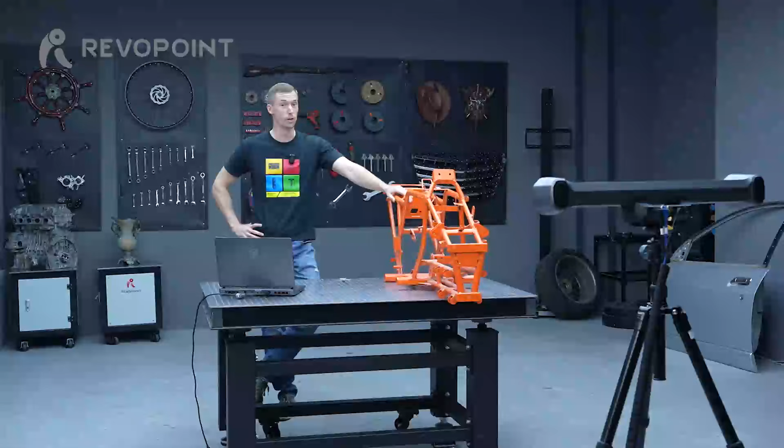So something to keep in mind. Is it small or is it large? And ultimately, do you want to merge it or do you not want to merge it? Okay, so here we go. Our first item that you need multi-positioning for, it's a little bit larger, the ATV frame.

First of all, I want to go over what kind of markers you get when you purchase Trackit. We give you a package of these magnetic ones, really nice 10 millimeters. But we also have the sticky 10 millimeter markers available, but that doesn't come with Trackit when you purchase it. You just simply have to go to our website. They're very cheap, and we'll send you a bunch of them.

Also, now the next step, the setup. I have this item. It's very long and narrow. So how I have it positioned, as you see, would be the most efficient way to do it. I have the tracker right here. I have this narrow part facing it. That's going to be the best way because it's going to allow me to simply move around it really easily, always picking up the scanner, and it's not going to get blocked. Because remember, the field of view is about 4 meters.

So if I had it positioned this way, I'd get over here, and the Trackit probably wouldn't be able to see me. So that's an issue.

So first and foremost, having the tracker there, thinking about how you want to position your object, this would make the most sense. Now as for marker placement, so I have a couple that are already out of the package. You need at least five for it to see.

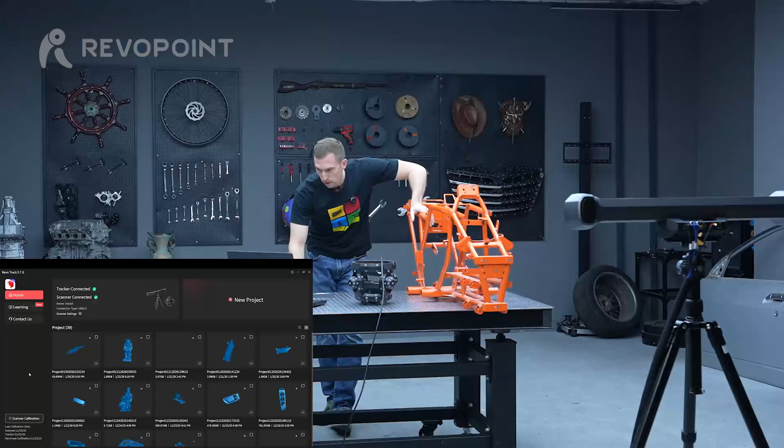So here we go. We have the option of new global marker or import global marker. If I was going to import it, that means if I had a friend or if I previously scanned and captured all the markers on another laptop or computer, and I wanted to import that data into here, I could do that and wouldn't have to capture it again. But since this is all fresh, we're just going to go with a new global marker.

And something else you can see, I want to bring this out in the lower right corner right here, you can see it says tracking quality excellent. If it ever says poor, you would want to calibrate your tracker, the Trackit, again, because that will definitely affect it. But since it's excellent, we're going to go ahead and keep on proceeding.

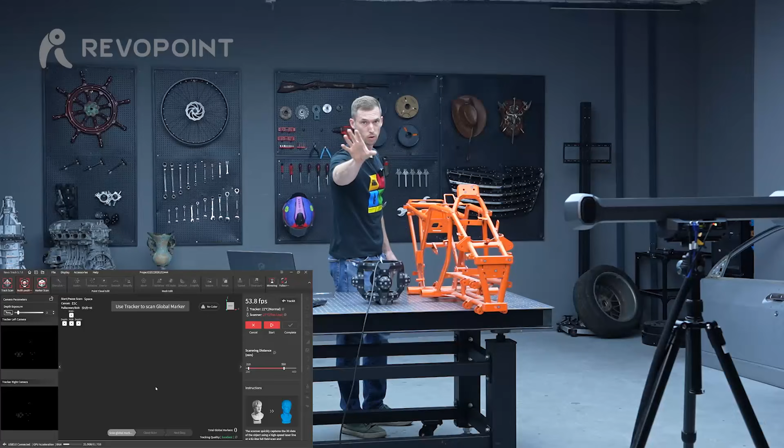And as you can see on the home screen, it's picking up all 6 markers that I have on there. This is a nice improvement with the software. Previously we would suggest putting the scanner in an area where the Trackit cannot see it, but the software already knows - it can tell that this is not part of the markers that you're putting on the item you're scanning. So you don't have to worry about it, because on the home screen it just sees what I have on the ATV frame.

So it's all good. Let's just push, let's select, I want to open this up first. Scanning distance, we can go ahead and widen that out. It's something to keep in mind. Click Start.

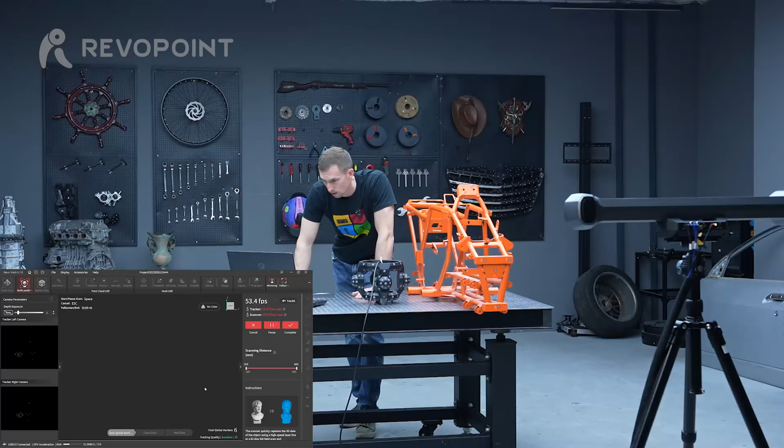Captured them. Complete. And now we're going to go on to the next process. It's captured the markers, so we're going to go on to actually capturing the point clouds now.

Don't click New Scan. Go to selecting Cloud Scan here. But we can first of all adjust this. I'm going to keep it at 0.70 target point distance. Depending on the item you're scanning, you can change right here. Let's select metallic shiny.

And here too, sometimes you'll see the temperature of the tracker and the scanner. My scanner is still a little cold - we're scanning in the studio here, which is ultimately a garage studio. It's a little tricky, so it's probably like 60, 65 degrees, or 22 degrees Celsius as we see. Don't worry about it, it should be okay. Ideal is if it could heat up a little bit, but it'll do fine. So cloud scan, go ahead and click that. And now we can go ahead and start.

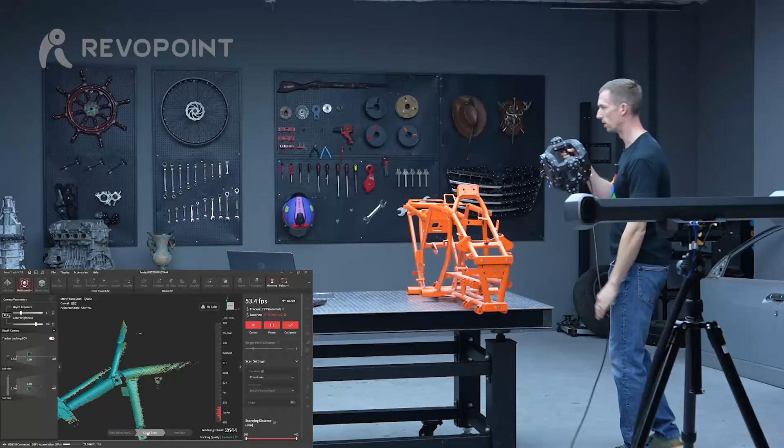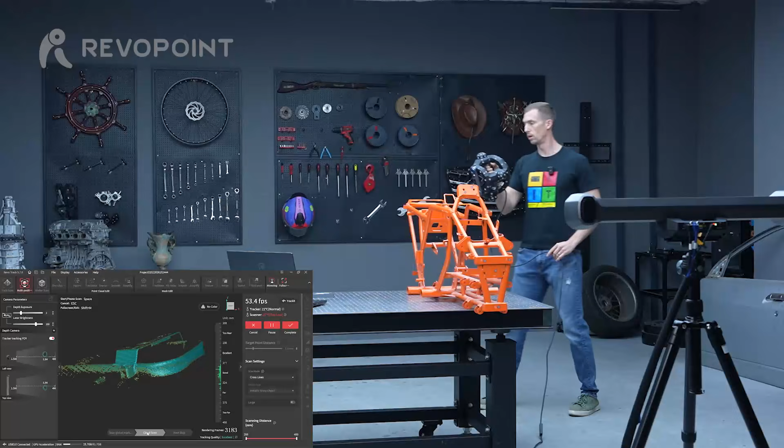You can always see on the left side the tracking field of view lets you know where you're at and how close you are. So right there, I'm getting too close to the tracker, 1.5 meters. If I go all the way to the back, you can see where you max out as you're coming up to it, 4 meters. So I got a lot of space in the back here. I can come all the way back here, plenty of space. Then even as you come to the side here, it tells me when I'm out of its field of view.

As I mentioned earlier, if we would have set up the ATV facing that way, you can imagine why that would be tricky. I'd be coming to the end here, it wouldn't be capturing it. Same thing over here too, wouldn't capture it.

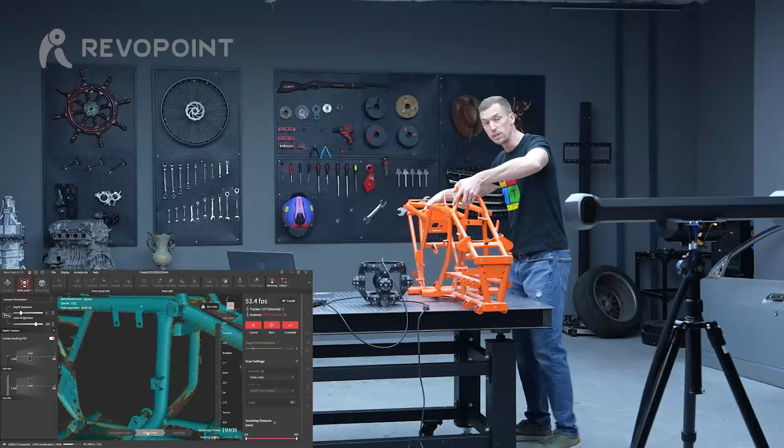Okay, so now we come to the first time we rotate it. I pause the scan, and really this is something you can also keep in mind. We have the markers on the ATV frame, so for convenience, I'm going to rotate this. But ultimately, if I wanted to, I could rotate the Trackit itself, the tracker. It just depends what's easier. Later, if you have an item that's much heavier and larger, you can't physically rotate it, so it would make sense to move the tracker itself around the item to capture those certain angles. But since this is light and small enough, I'm simply going to twist it like this and allow us to continue capturing more data.

Again, just rotating it that way, the tracker itself can still see the 6 markers that I've placed on the front.

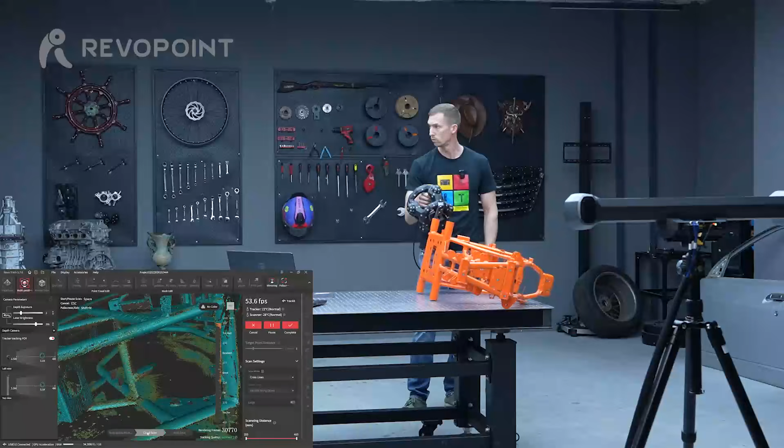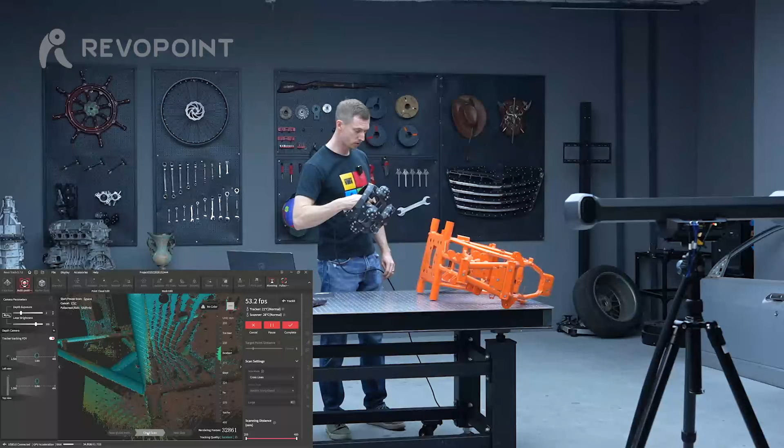So this here is a little bit of advice to you. As you can see right now, I'm trying to scan the bottom, but because when I was previously scanning it from the top, I captured a little bit too much of the table. So maybe something to keep in mind, the software is going to clean this up later. The only thing that makes it hard for me now is just seeing the holes, what I'm not capturing on this bottom plate, because I have a little bit of noise from the table. So if you can, when you're scanning an object, try to avoid capturing as much as you can from whatever surface your piece is sitting on.

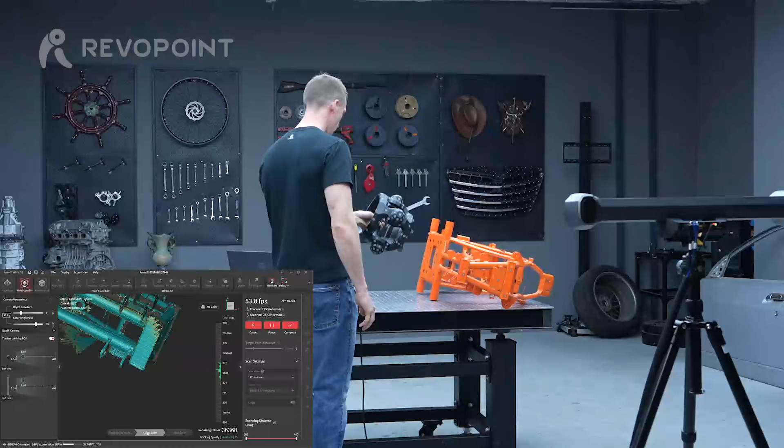Now let's go ahead and rotate it another time so it's completely upside down from its original position.

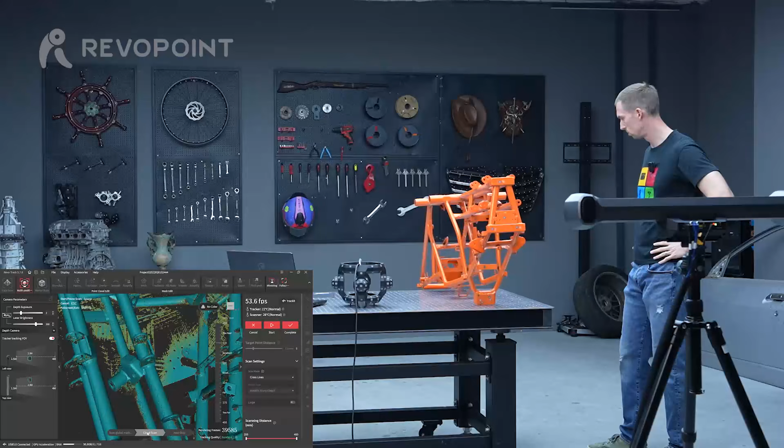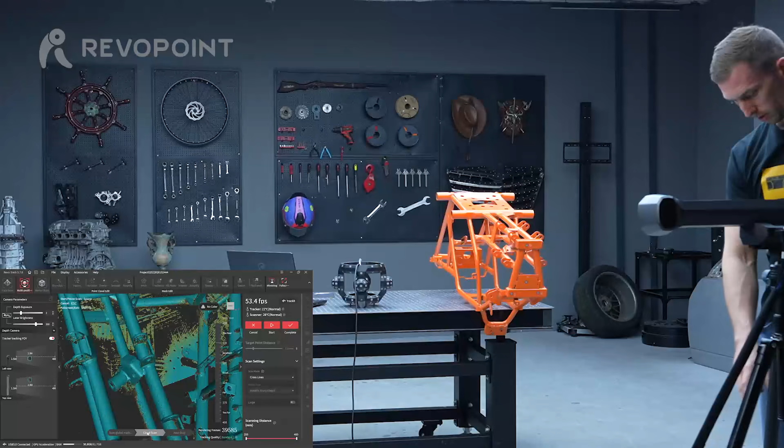So obviously movement is okay, but you see it's rocking right now. We don't want it to rock, so try to find a way to put it so it's no longer rocking. This is pretty sturdy. But we might have to move the tracker itself back a little bit now because we moved it to the front of the table.

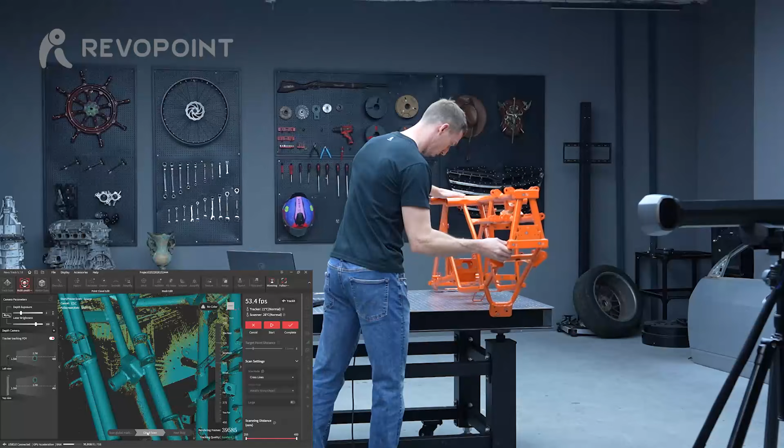Let's see if it actually can pick up those. If it doesn't pick it up, I'll just have to rotate it, skip it, being completely upside down. I'm a little concerned that it's not going to see those markers right there perfectly. It's too wobbly that way.

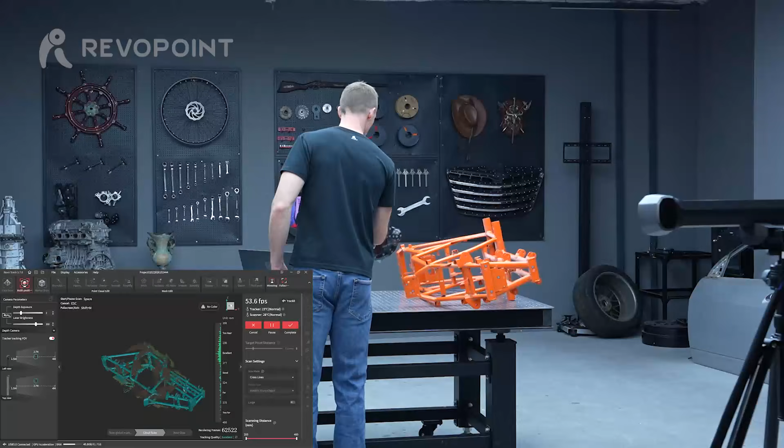Okay, there we have it. I feel like we have a pretty complete scan there. Let's just run it through the processing portion now, edit it some, and see how it turns out.

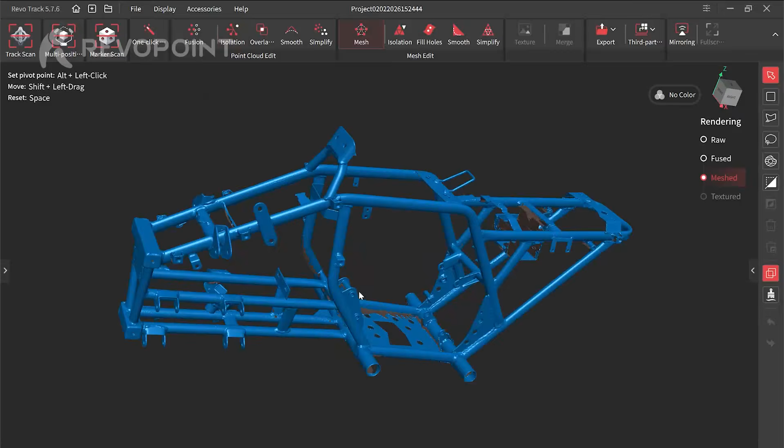All right, so we just had a great result. Love how the ATV turned out really nice. So just as a review, using multi-positioning for this particular item, what did we learn here? What did we go over? First and foremost, we determined the size, how we want to position it.

Maybe because this is long and narrow, and if we were in a room that's a little more cramped—but this room is really wide—if you did have a cramped room, you'd determine where to put the Trackit, and we're simply going to rotate this around because it's small enough that I can physically rotate the ATV frame itself. Because of that, I put the markers in the front here where the Trackit can see it at all times. And how many did I put? At least put 5, I ended up putting 6. Of course, if you have a larger item, you need to put more, it all depends. There has to be a minimum of 5 in the field of view of the Trackit, which is 4 meters. So that's what we did.

And obviously we rotated a full 360. I could have chosen to rotate the Trackit around here, but I didn't because it was easier to just rotate this, so I just rotated the ATV itself. Hopefully that was helpful, and in the next item we're going to go a little bit larger and we'll see the process with that.